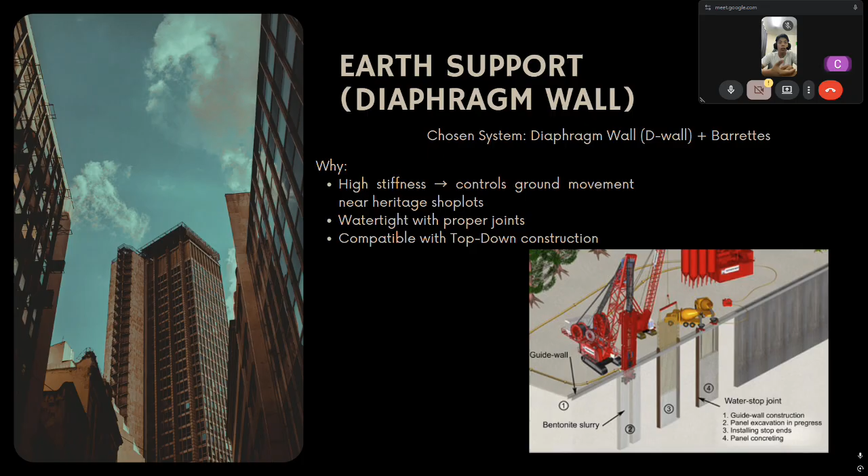Diaphragm wall is also watertight with proper joints, so it can prevent water from coming in. It's also compatible with top-down construction. Next is the earth support construction sequence. We have two phases. Phase one is the guide

wall and survey control. Small guide walls are built first, about 1 meter deep, to keep the diaphragm wall grabs aligned. For survey control, points are fixed to ensure vertical tolerance of plus minus 50 mm. This step is critical in Penang because uneven walls could cause leakage or excess movement near heritage shop houses.

Next, the slurry plant and muck handling. We will use bentonite or polymer slurry to support the trench during excavation to prevent it from collapsing. A slurry plant with a tank is set up on site, and excavated spoil is loaded into sealed bins and hauled away only during night windows approved by MBPP. When we work in Penang at night, we need approval from MBPP to prevent our company from being fined.

Next is excavate and cast the D-wall panels. Diaphragm wall panels are excavated with a grab or hydrofraise, then cleaned at the base. Stop end pipes and water bars are inserted to seal the joints between the diaphragm walls. The reinforcement cages are lowered and concreted using the tremie method.

The tremie method is straightforward. It keeps the slurry out and ensures continuous placement. Using this method makes the D-wall both the retaining system and the permanent basement wall. For phase 2, we install the barrettes plus plunge columns for the core loads. Next is capping beam plus monitoring.

A capping beam ties the D-wall heads together to help distribute the loads. Throughout, real-time monitoring instruments track ground movement, vibration, and settlement of the surrounding shop lots. It's important to prevent the shop lots or the heritage building from being damaged. The last thing is the visual and timeline flowchart. This work is usually at weeks 38 until 50.

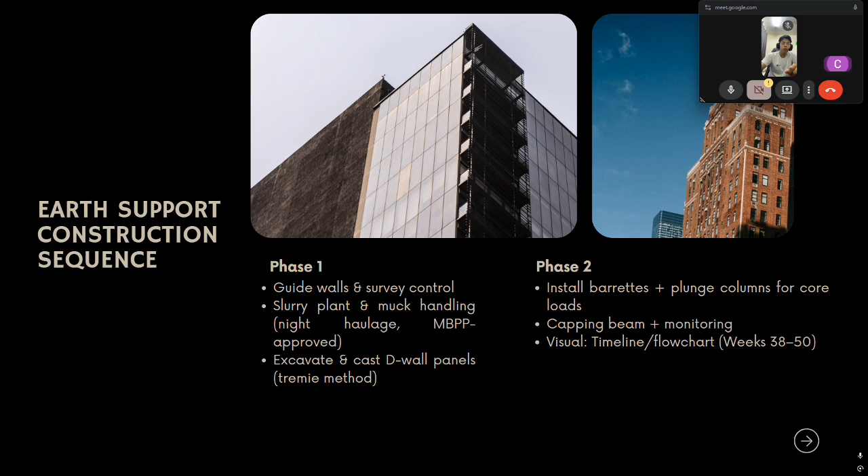Next is the basement construction; we're using the top-down method. Its advantages are minimal footprint and less traffic disruption, so you will not disturb, and you will have less sound pollution. Top-down joins two works, the superstructure work and the basement work, together in one method. So it's called the top-down method.

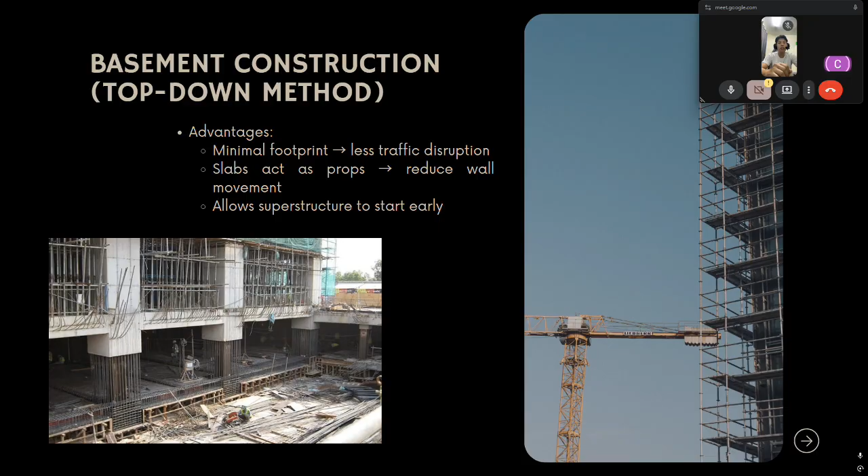The slab acts as a prop. It reduces wall movement and allows the superstructure to start early. Then the top-down sequence. First, we cast the street level slab with an access opening. We cast the whole slab and leave one opening for our workers to go down to work. Then excavate below via slab openings.

Cast basement negative one, the basement floor. When it's done, it becomes a prop that holds the building's side walls. Cast the base raft, and we can also include anti-buoyancy design and waterproofing when casting it. Remove back propping after strength gain. After the concrete gains its strength, we can remove the back propping and continue the other works.

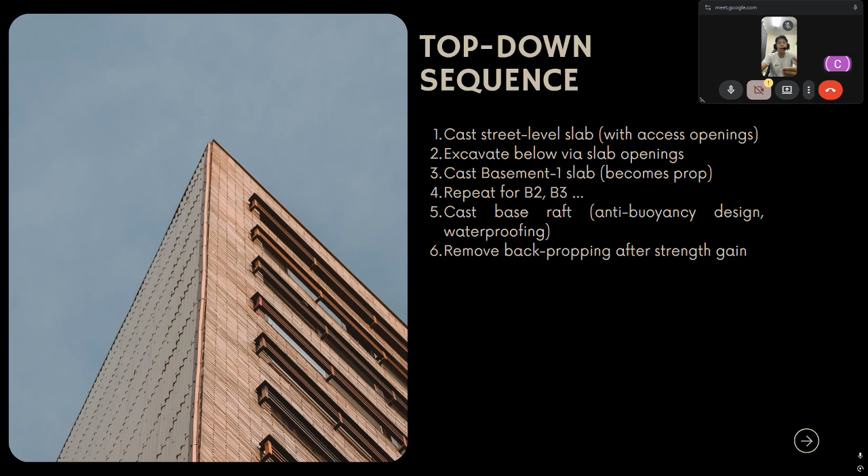Next is the concrete handling strategy. As stated earlier, we take concrete from YTL in Penang. We use ready mix, and usually plan our pour times from 10 p.m. until 5 a.m., night time, because Penang has high traffic problem areas. The concrete temperature is usually equal to or below 32 Celsius. Slump and cube tests are needed, and early strength checks are also needed.

The method we're using is mobile boom pump. Although our site has a tower crane, for this early stage the tower crane is quite slow and consumes a lot of time. Mobile boom pump is more suitable because it can park beside the roadside, and it's fast and efficient placement. It has a small footprint, reduces labor, and avoids cold joints when matched with just-in-time delivery from YTL Penang.

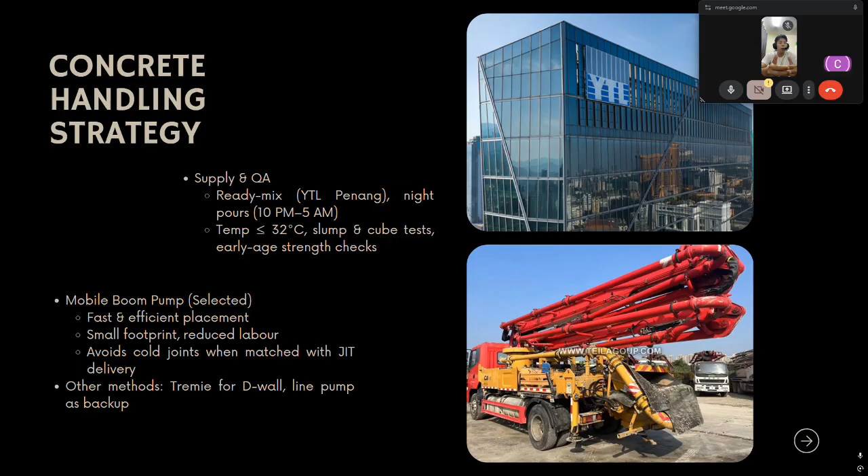The other method is tremie for D-walls, with line pump as a backup. Monitoring and safety: real-time instruments like inclinometers, piezometers, and settlement markers. These three are important to make sure the heritage building beside us is safe, so no settlement happens to the heritage building, and the inclinometer checks the incline degree of the buildings.

Other than that, crack gauges on shop houses act as heritage protection. There are also trigger action levels tied to method adjustment. Last of all is traffic and community management. When we work in Penang, we need approval from MBPP and traffic control from the traffic department.

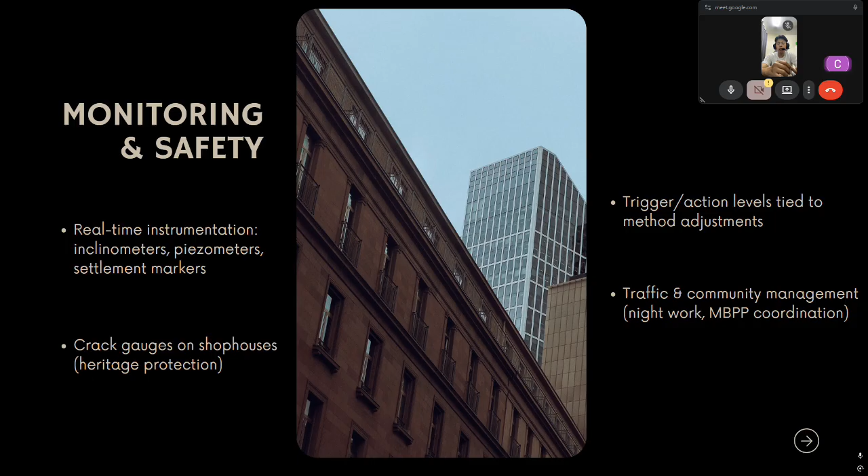In conclusion, I think the best method for Penang is top-down plus diaphragm wall, because it's beside a busy road and heritage building. We also provide safety for the heritage surroundings, and we enable concurrent construction, so time saving. Mobile boom pumps ensure efficient, clean and safe concrete placing.